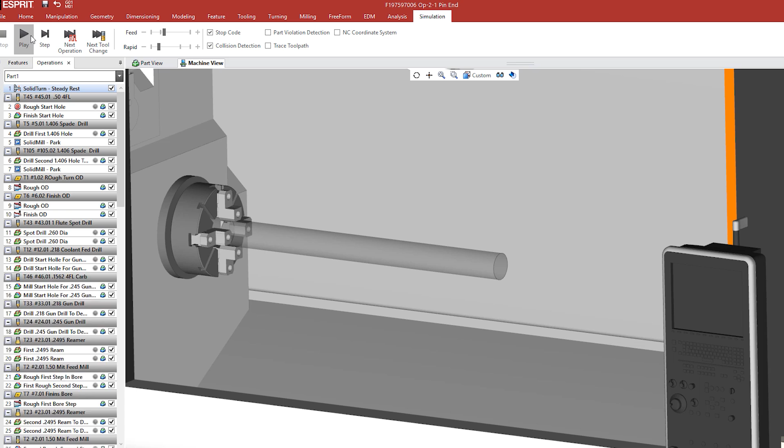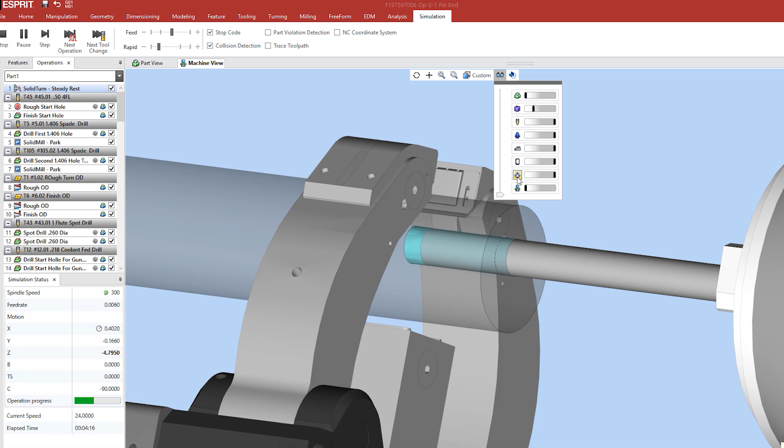I wanted to make a little video here about this setup. There's a lot more going on here than seems to be obvious. Right now in the beginning here, I put this in the program just to prepare the setup material, the aluminum setup material with this deep hole that's in there, because the stock that I'm getting, let me hide the steady rest, let me hide everything but what we need to see here.

The stock that I'm getting already has this 1.4 inch hole. I kind of mentioned this in a previous video on making this piece that's going to go in this hole that I'm going to drill into, which you'll see a little bit later in this simulation. But there's kind of a lot of things going on here, and you have to make the right order of sequences to get this done.

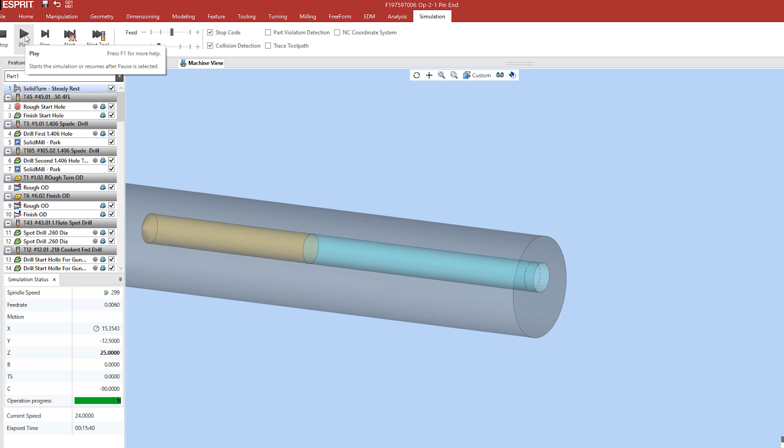So that was just to drill the hole in the setup material. And now this is going to be the actual beginning of the machine work that's going to happen. So here's the rough turning OD. There's a thread, kind of a pin end thread on the end of this part, and this is just roughing down here. It's taking kind of shallow cuts, you might notice, because there's actually holes that this tool is going to be intersecting.

I wish I could get rid of these. See these icons that come up for the speed of the simulation? If anybody that's working for Esprit sees this, let me know how I could get rid of those little pop-up things.

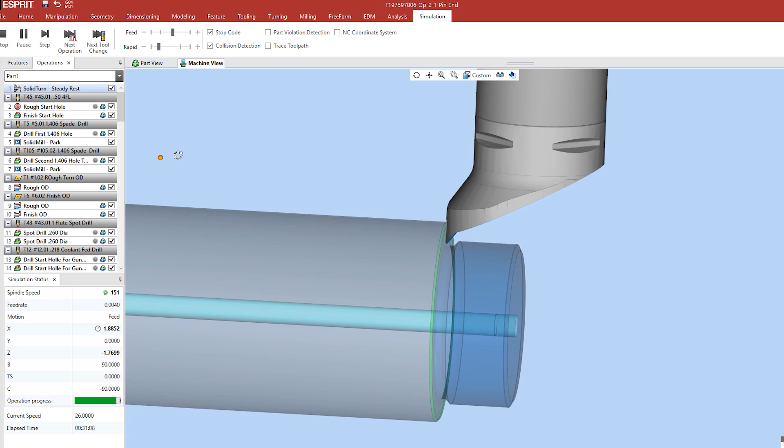But anyway, that's the finish OD tool. It roughs the thread relief, and then it finishes out the OD for that end. Now this is just going to spot drill for some holes that start the gun drills that go in here. That's milling one of them to size. And this is a .218 diameter gun drill that goes deeper down in the part below the ports that are going to be put in the end of here.

And one of the reasons I want to show you this simulation is the importance of the order of operations in a setup like this, because if you do certain things before other things, you wouldn't be able to accomplish the machine work, is the only way I can kind of put it. So in particular, this hole that it's drilling right now, there's these pins that go in the bore here, and they get halfway machined away. So that's the initial reaming of those holes, just so I could start the reamer further down here. You'll see in a second what I mean.

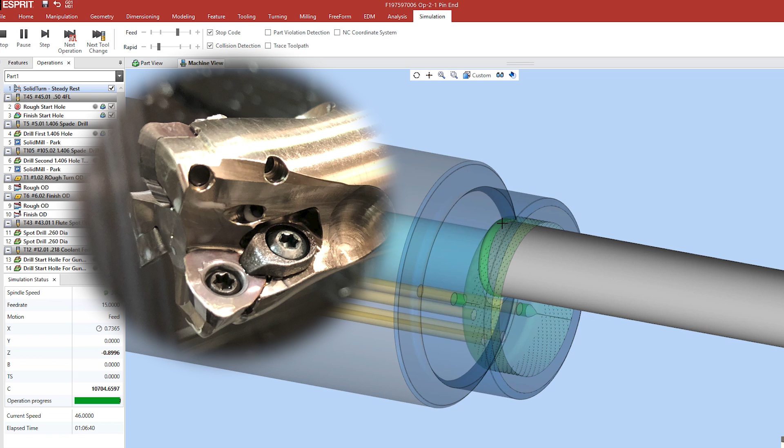So this is a feed mill, 1.5-inch diameter Mitsubishi feed mill, actually, is what I'm going to do this with. So it's going to rough down that. Let me pause the simulation right here a little bit. It roughs the initial counter bore, and this bore has a counter bore, and then it gets a little bit smaller up in here. And if I play this a little bit more, you'll see what I'm talking about.

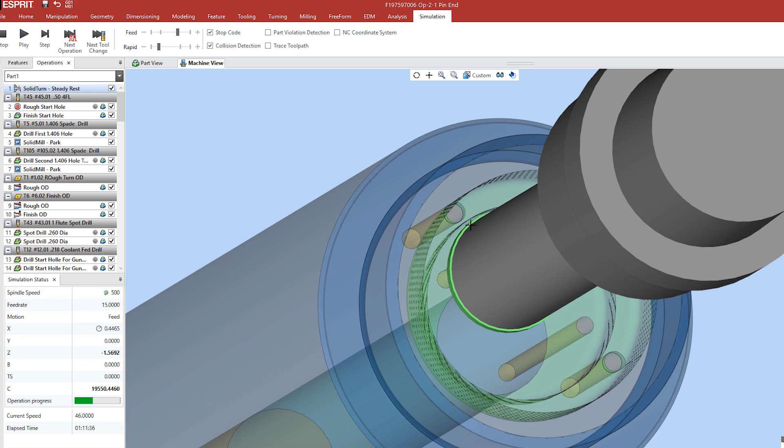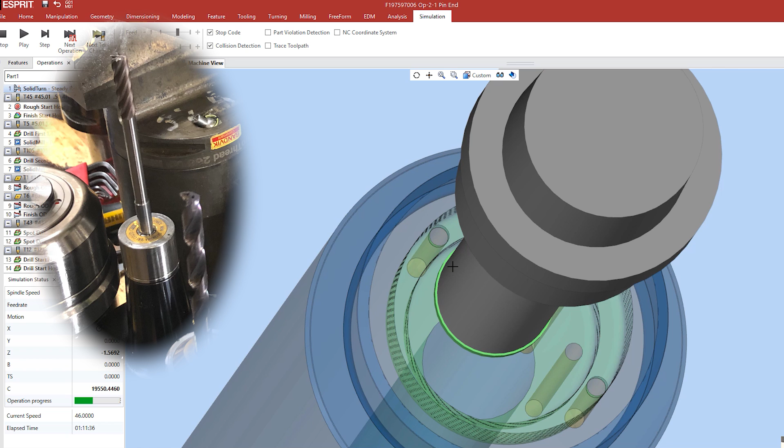See why I had to drill those holes first, because it's going to machine away, but I have to leave stock here, if you see this hole, so that I can finish reaming it. And the only reason I didn't ream it all at one go is my reamer's just not long enough to reach down in there. The shank of the tool had to be relieved even to get from the point here down. But if I went in and machined the bore out to size at this moment with this feed mill, it would be cutting halfway into this hole, and I wouldn't be able to finish it to size.

So what I'm doing is I'm roughing it out up to the hole here, down to almost the finished depth, and then I'm going to come back after that and finish reaming those holes. But like I said, the reamer that I have, or the reaming tool, well, this is just a boring tool to bore it out a little bit more there, and this is the reamer. Pause the simulation here, let me slow it down a little bit, and it's going to ream down to depth, as you see there,

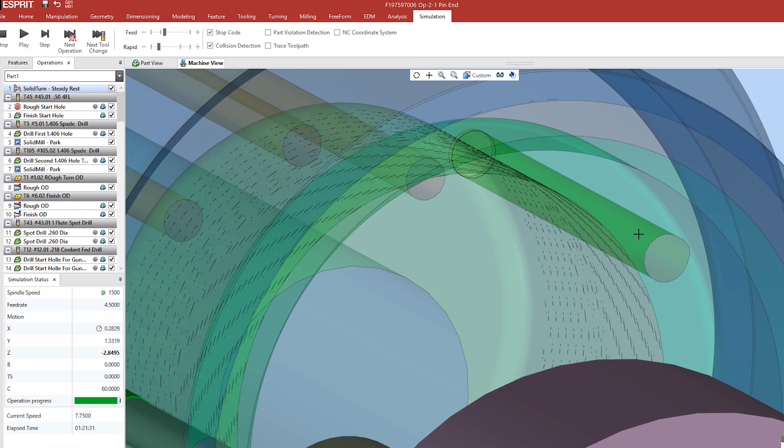the depth necessary. But if I was to have roughed out that material, there would only be half the hole left for the reamer, as you're going to see in a second here, because the roughing end mill is going to rough that out after this.

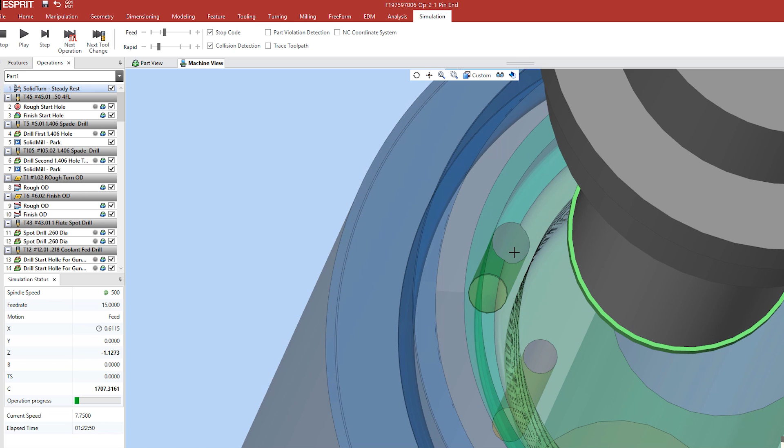So then we come back with the feed mill again, and if I let it run a little bit here and then pause it, let's see if I can pause it here. You see how this is cutting half that hole away, because what they do is they put pins in this bore, and it must index something, and half the pin projects into the bore, and the only way to get that hole in there is to drill it before you rough the bore out.

Well, I have actually milled them from the side, like with a 5-axis move, but that's kind of a pain. I'm just going to try to do it this way on this part. The only disadvantage to doing this is it gives you a little bit of an intermittent cut on the finished boring tool, but I don't think it's going to be too much of a problem, and this titanium's pretty soft. That might give you more of a problem in something like Inconel than this material.

So let me kind of speed this up a little bit more. Yeah, this software has this window that comes up here. If I move the mouse away and back, see that little pop-up window about feed override? I wish there was a way I could turn that off for these video simulations.

So that's the feed mill roughing down now the bore to full size almost. And then this is just going to be a heli mill, ISCAR heli mill, to finish the bottom face. And the only reason I'm doing this is because I don't want to put a small enough boring bar in to face down to the middle.

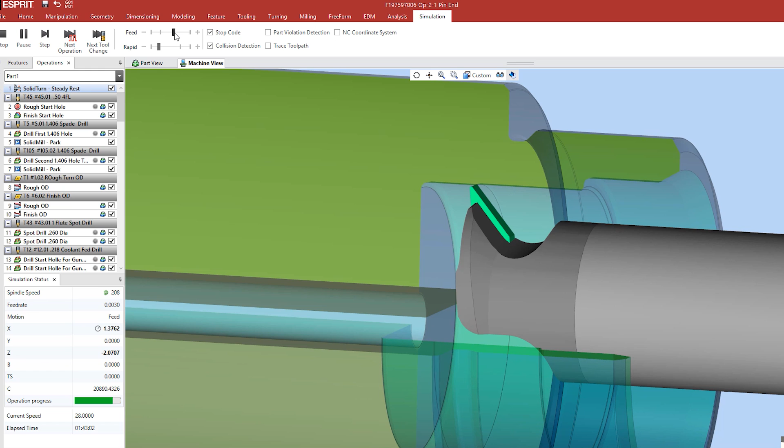So this is the, maybe I could just cut this away, you could kind of see this better. This is the roughing boring of the remaining smaller counterbore below. It already roughed this one above, and then it's going to do a finish cut down the whole bore. So that's the finished boring cut. And then let me see, I can't remember what tool comes next now.

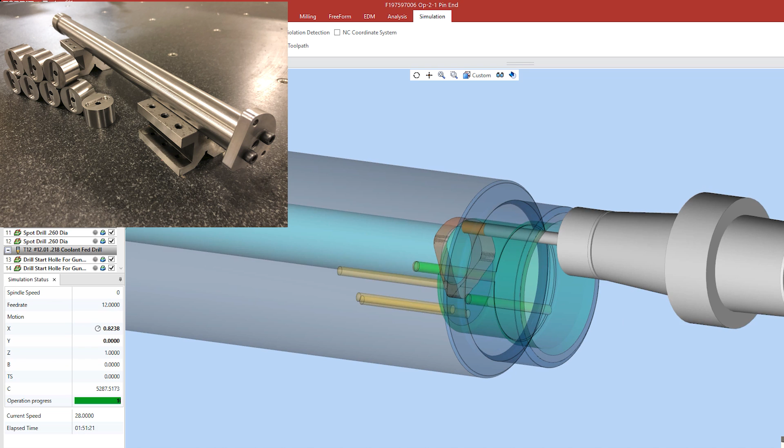Oh, this is a little, I don't know if you remember the last video I made, there was this little drilling fixture thing, and this is the part that's going to mount in the part to hold the other piece down in that hole to drill. You'll see that a little bit later in this simulation. So everything kind of has to be done in the same order.

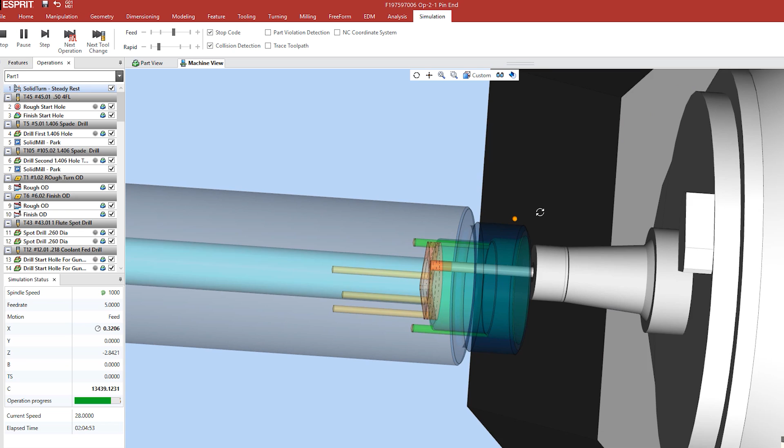You notice on this new Esprit simulation how you can put the actual models of the tool holders. If I turned on, well, let me not turn on that, but I'll turn on the spindle of the machine. You can see the spindle of the machine here, but it's clearer without that.

So for right now, this is a 5/16 end mill. It roughed it out with a 1/2 inch end mill, and then this is the heli mill again to rough this bore. Now this is an issue here that I have to be very careful with, because this bore gets roughed. I'm going to pause it right now for a second and get up a little closer here.

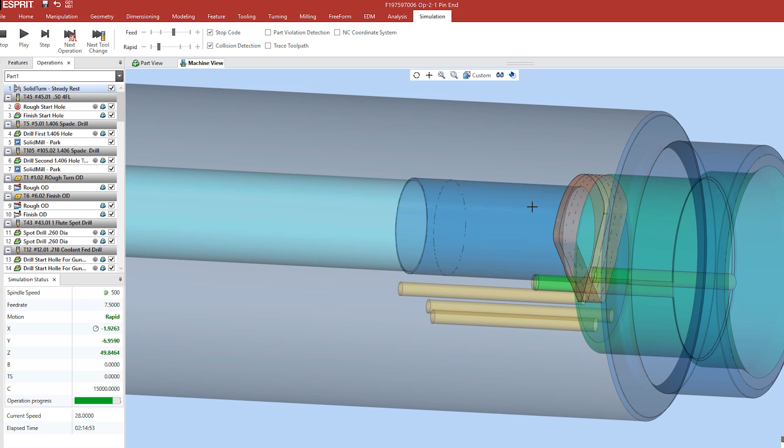Maybe I should look at it from the side a little bit more here. The first part of this hole here has got a close tolerance and finish, but the back part of the hole, for some reason the engineer designed it with a 38mm bore, or drilled hole if you will, but the hole in the front is only 1.501 plus or minus 1/1000th tolerance, and it has to have a 32 finish that goes back in here. You'll see that in a second when it finish bores it.

But if I was just to drill this with drills, 38mm is 1.496, and the finished bore in the front here is 1.501 plus or minus 1. And if I put any kind of little scratch or anything in the front of this bore, it would pretty much screw the part up. So I need to be very careful here.

What I'm doing is I'm going to rough this out down beyond that bore, and then we're going to come in with the boring head and bore it to size to the 1.496 diameter of the drill. So that's what that's doing there. And then I'm going to come in with the short drill. I've got to do this with 2 drills because it's such a deep hole.

And what I'm going to do is feed into that hole with the drill running backwards to where I get beyond where this good finish has to be, so I make sure I don't scratch it or put a gouge in it, because I'm only going to be boring out about 5 or 6 more thousandths of an inch off that, which is only 3 thousandths on the radius on the wall. And so I can't afford to put any scratches that are too deep in there.

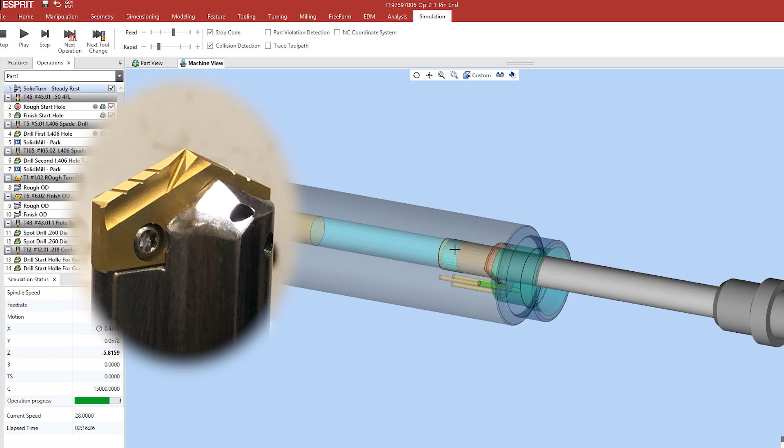So this spade drill, I'm going to run it in reverse at a low RPM till I get back into here like you see it, and then I'm going to drill down to depth, and I'm going to basically do that with all of the tools that go down into this hole. So this is the short drill,

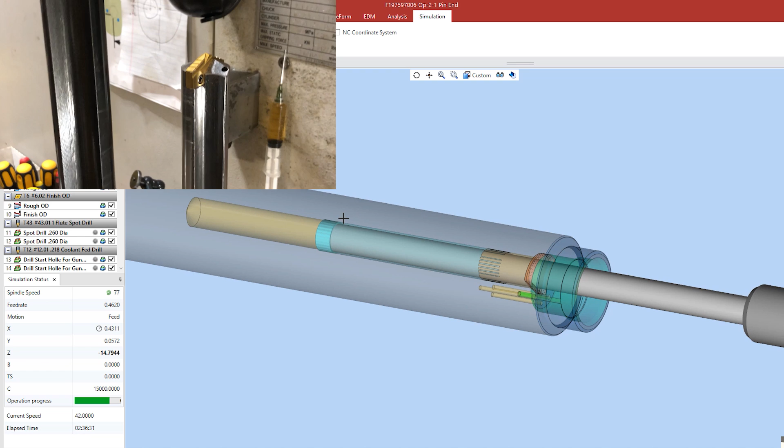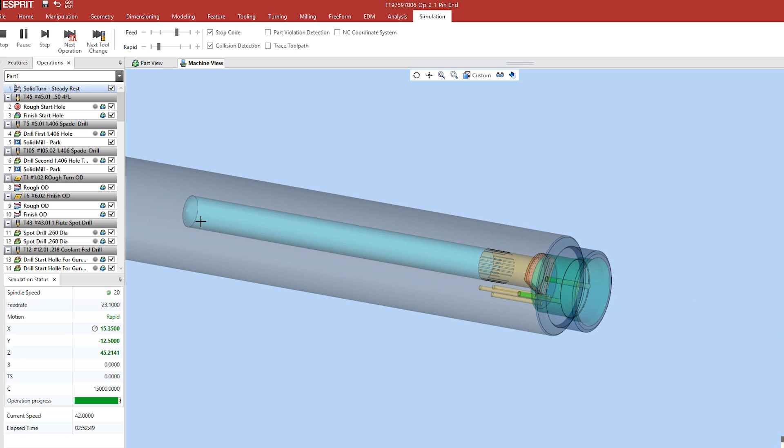and you may have seen these drills on the Instagram post that I showed, and then this is the longer drill that's going to go all the way to the bottom, which is 20 and a 16th of an inch, 20.06 inches from the face of the part to the bottom of this hole. And then the bottom has to be flat bottomed with a 0.190 radius on the corners of the flat bottom. So that's what this drill is doing right there.

So that's the drills. And like I say, I have to be very careful of the front of this bore right here, kind of where the mouse is, not to scratch it or gouge it too much to where it won't clean up to the 1.501 diameter. So that's important. And these are the 2 screws that I talked about in the previous video that's going to hold that drill fixture in.

Now there's the boring head to bore it to size. So that's how deep the 1.5 inch diameter goes into there. These little marks here you see are the simulation. If I increase the resolution in the simulation, you probably wouldn't see that, but it takes longer for the computer to handle it.

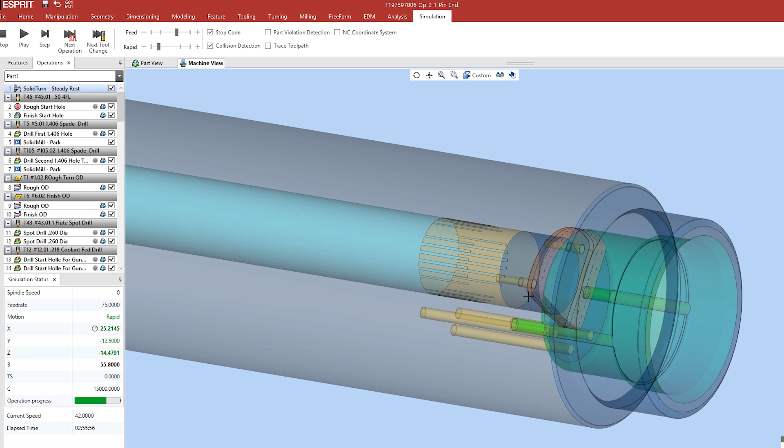So that drill fixture thing that I made in the earlier video is going to fit in this triangular kind of pocket, and it's going to hold the sacrificial piece way up here at the other end of the bore, or hole if you will, so that I can drill these cross holes, which you're going to see later in this simulation. So let's just continue to play it.

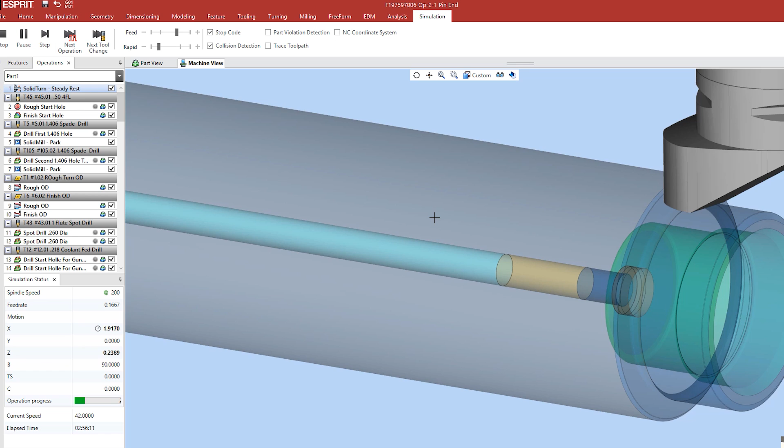This is the OD thread, and then the blunt start. Let me make this more solid so you can see this blunt start a little better. I've had a lot of people ask me about blunt starts in the comments, or a Higbee blunt start, whatever you want to call it. Now you can see it's milling it here. And this is the way I typically do it on the Integrex, because I like the way this finishes the blunt start.

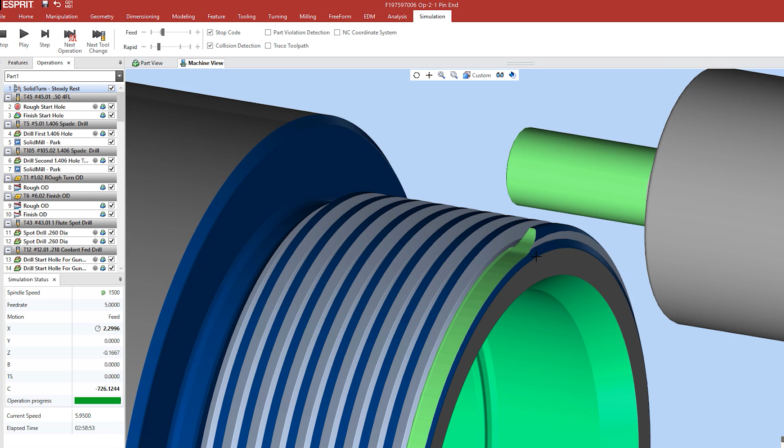This thread in the simulation will probably be a little bit deeper in reality. That's why you see this little bit of a step in the blunt start, because I don't think I've gone to depth in the simulation on that thread. I think it'll go a little bit deeper. I went to kind of the minimum depth on the Acme thread according to the gauge maker information, and I usually adjust that with the offset on the machine when I thread it.

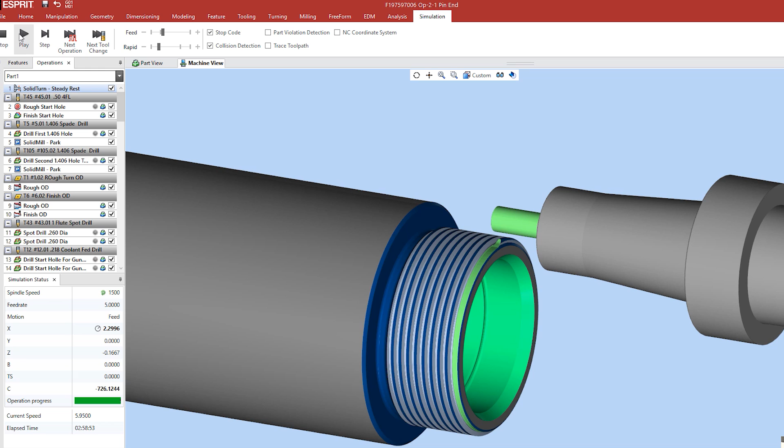But there's a couple different ways to make a Higbee or a blunt start, and the way I do it on the mill is I just draw a helix, and I profile down that helix that matches the pitch of the thread, of course, and the way you can line this up is using a different fixture offset, and you use your C-axis fixture offset to line it up. So I usually start the blunt start helix right at Z0, and I feed in with cutter comp, and then I go around the helix.

In this case, it's rotating the C-axis to make it, because I can't go below X0 too far on this machine. If you had a machine that could go further around, you could just mill it down around there. But this Integrex only lets me go 10 millimeters X minus, and then it hits the limit of travel. So I have to do everything above and do a rotary milling type of thing. But basically it's the same thing, just a different style of milling.

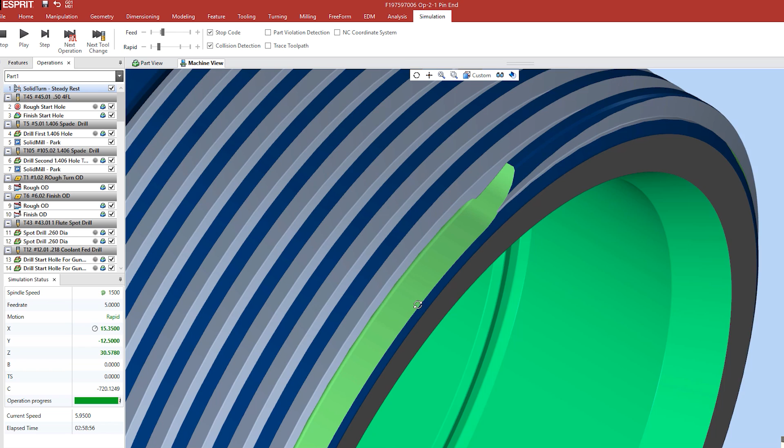And what I usually do is, you see where the thread just kind of angles out to nothing on the end of the part, and it's pretty easy to line this up.

If what you do is you program that helix, you don't worry too much about the alignment of it in the simulation, although it actually looks pretty good here, but it wouldn't matter because you can adjust it when you run it on the machine. So what you do is you let it come in single block until it's right at the beginning of that helix, and then you stop the machine and you look at it and say, am I in line with the beginning of that thread or not? Right where the last scratch of the thread comes out the face of the part.

And if you're not, you kind of estimate the amount of angular displacement or rotation that you're off, and then you adjust your C-axis fixture offset that you're running this on. You run it on a separate fixture offset, and you adjust the C0 of the offset until you get it to line up when the tool first comes in here, and then it'll go around and it'll be in line.

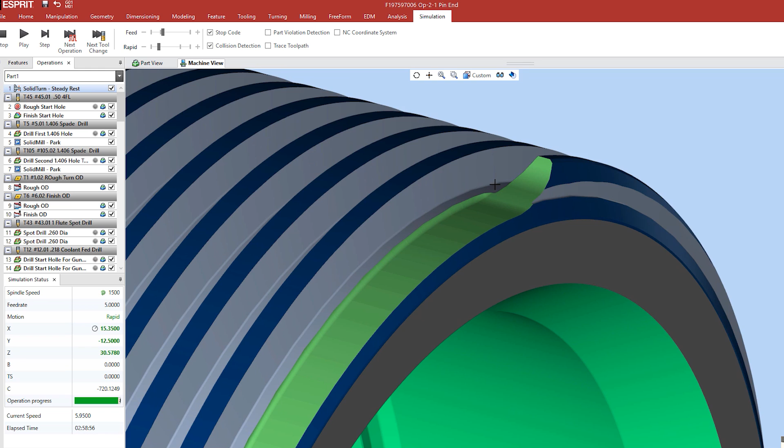Now, an Acme thread has a flat on the bottom of the thread, and it's pretty easy to line up an Acme thread. But if it's a V thread, once you get your rotation in the right place, you can stand off with your Z offset on your tool, keep moving it in and keep rerunning the Higbee until you get it lined up with the bottom of the V of a V thread, and then use your diameter offset because you're using cutter comp here. If you programmed it that way, you can adjust it till it gets down to the depth of the thread. If it's off a little bit, you can start with the cutter bigger and then move smaller until you get it lined up, which is what I'll do in this case as well.

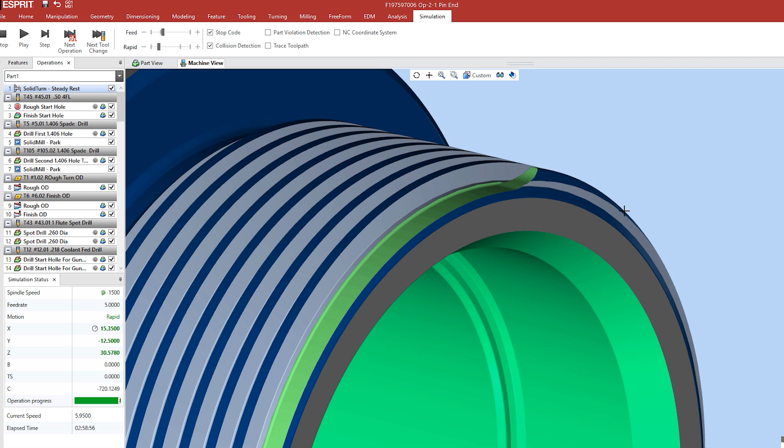So that's the way that I like to do a blunt start, and I like it also because I like the shape of it here rather than using a grooving tool. Now the other way is with a grooving tool on a lathe that has no milling, and you program a very short threading cycle just like the one that makes the longer thread, and you pull the tool out after you get maybe one lead of the thread in. You retract the tool, or you make it only that long, and depending on the RPM you're running and how fast the rapid movement of your machine is, it depends on how far it carries this around, but it tends to make it more like that gray color you see there when you do it with a grooving tool, and I don't like the shape of that as well.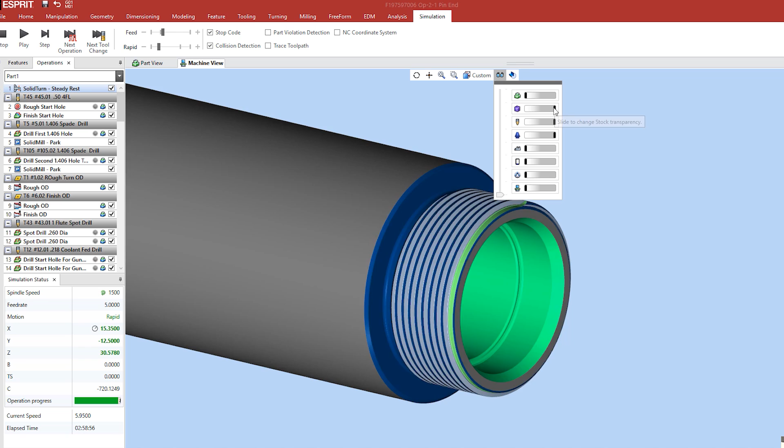So that's a couple different ways to make a blunt start, and you do it the same on the ID as the OD. There's no difference really, except that you kind of have to conventional mill it on an ID thread, but that's really not a problem with this. It's such a little amount of material you're taking away. So that's the blunt start. Let me go back to a semi-transparent view, and we can see the rest of this.

So the next thing is a chamfer on the front of that close tolerance bore, and that also has to have a 32 finish on it. So I'm just doing that with a separate tool. Let's see, I can't remember what's next. Oh, these are the port tools. So this is just a drill to rough the ports out, not to size, but just to get the major meat of material out of there. And then there's a rough porting tool, which is this tool, going to feed in to rough the port and get that little counter bore in the bottom roughed out.

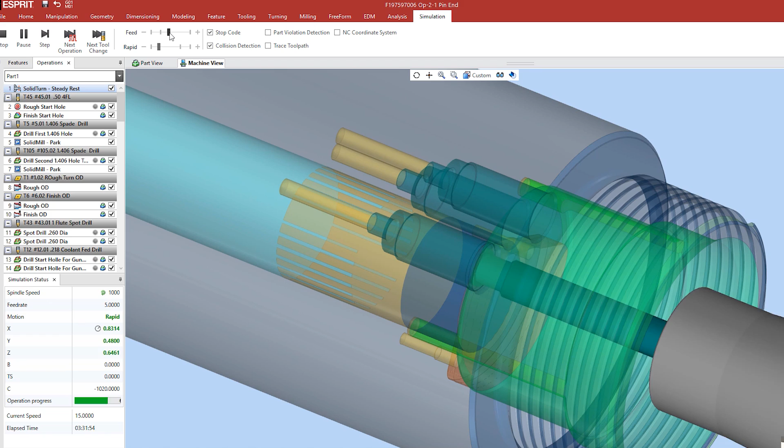And I posted an Instagram post showing some tools that I was setting up for this, and I showed these in the picture, the real tools. And then here's the finished port tool. And I found that I have to feed this up and back. I don't like to do that with tools too much, but in this case, if you just rapid out of that hole, it leaves kind of a spiral mark in the hole, and they don't like that because this finish has to be good on this port. Some kind of O-ring seals or something in there. And so then there's a snap ring groove here, which I ground a special tool for. And then there's these spanner wrench holes in the OD of the part on this end.

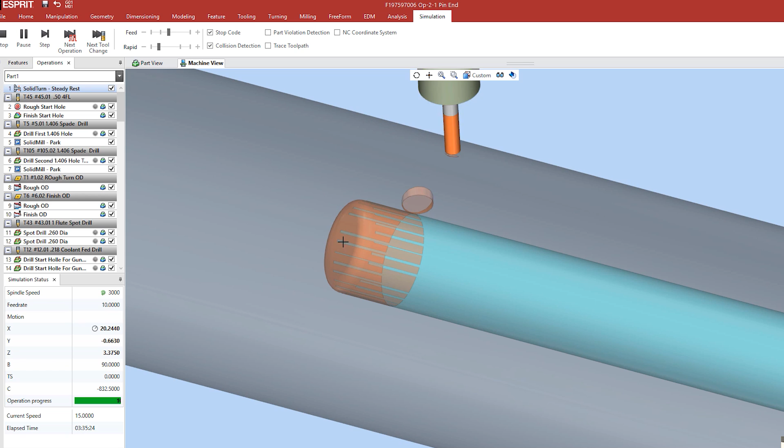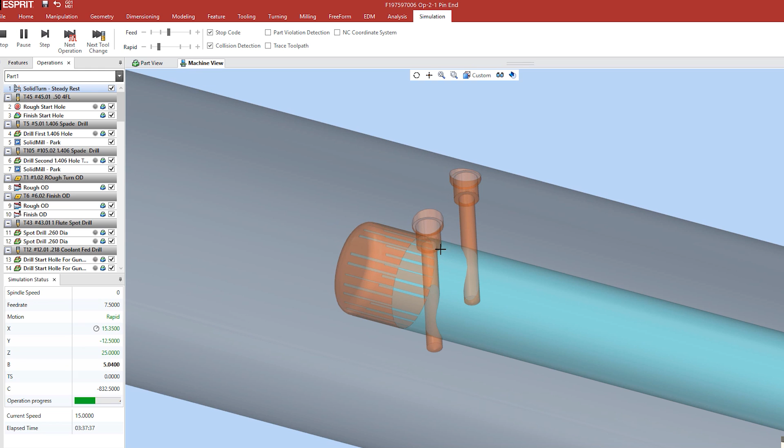And so then we come up to these holes up here, which is what I made that drilling fixture for earlier. I don't have the fixture modeled in this model, but you can kind of get an idea what it's going to do. It's a spot drill, so that this drill doesn't wander off too much. And I drilled part way down so that I can start milling these counter bores, because my drill's just not long enough. I couldn't find the right length drill, and now I drilled a depth with that drill, and I was just a little beyond the flute length.

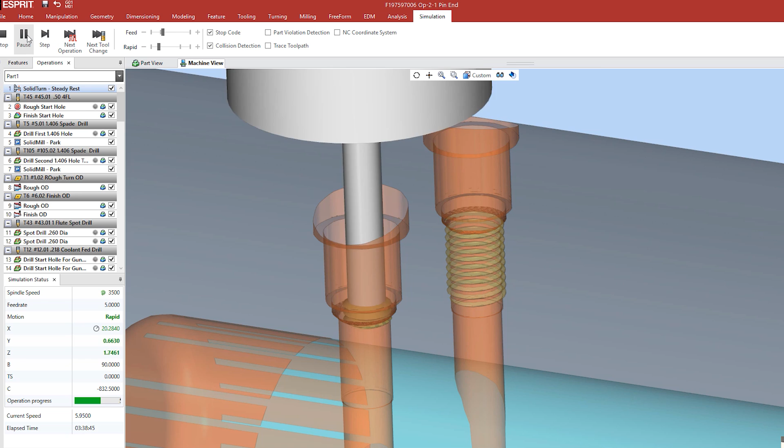So then I resized. There's a thread that's going to go in here, and I have to size that hole, and let me pause this a little bit and mill this chamfer in the beginning of the thread they specify. And here's a 5/16-24 thread mill. Let me slow this down a little bit so you can see this. Oop, a little bit more maybe. So this is a thread milling cycle, and that's one of those thread mills with just 3 teeth on it out on the end.

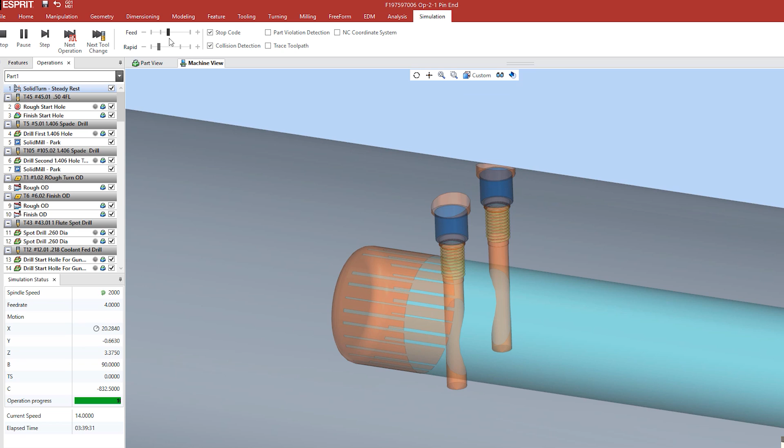And we come back on and bore these holes to size with the boring head. I'll probably really use a bore orient retract cycle, but on this simulation it'll show a collision with the boring bar if you actually put it in the program here for some reason. And then a chamfer on the top of those 2 bores. There must be a plug with some seals that's going in there to seal off. I think they put some kind of pin.

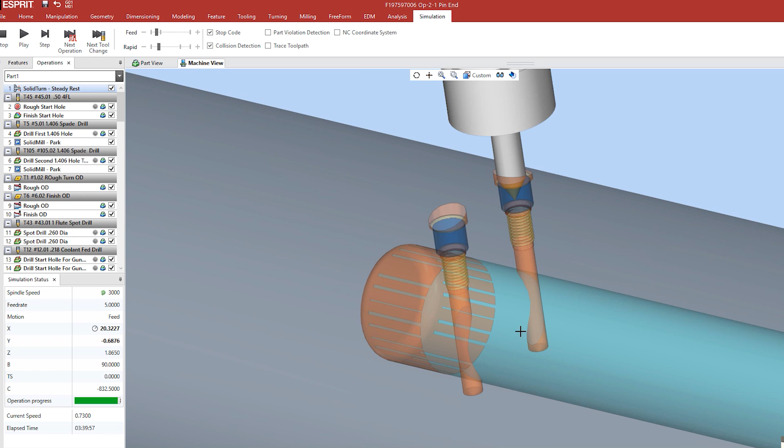You can kind of see the reason that I needed that plug to support the drill now. So you see how the drill is almost totally in the hole itself, and you would never be able to drill a hole like this. It would just deflect and either break the drill or mess up the bottom of this hole down here, by deflecting the drill.

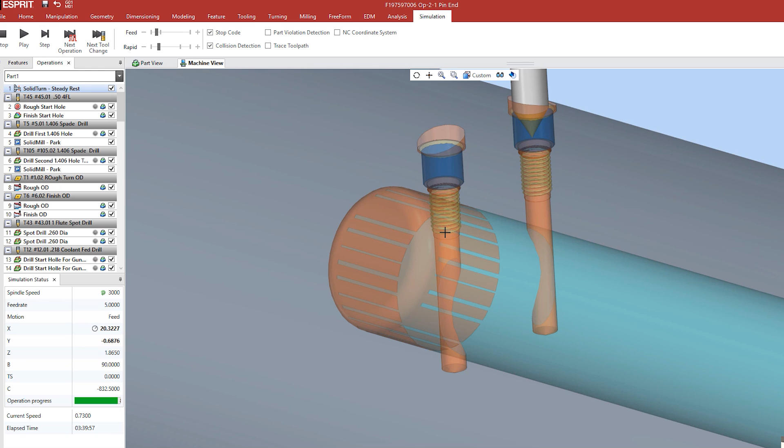And it might be possible, some people in the comments on that video on this device suggested doing some kind of an end mill down in there, but this is a 1/4 inch diameter hole, and that's an awfully long end mill to reach down beyond this threaded part and mill all the way down to here, and it would be just very difficult to do, if even possible at all.

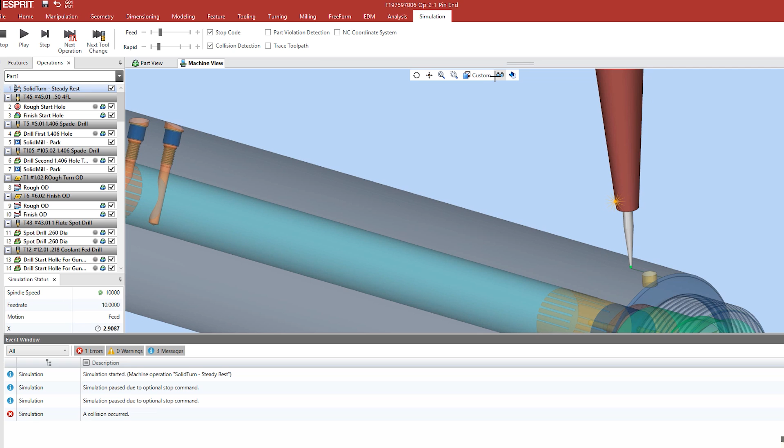So that's everything there. Now here I'll get a collision with the steady rest. It actually shows it in this software, but this isn't the way my steady rest is. Right there it collides with the steady rest. So let me turn on the steady rest so you can see what's happening here. See, the tool is hitting this. My steady rest doesn't have these things on it. The jaws only come out as far as this radius, so this won't happen, but this is the model that Esprit gave me for a steady rest, which is almost like mine. I need to remodel mine so that it's a little bit more accurate.

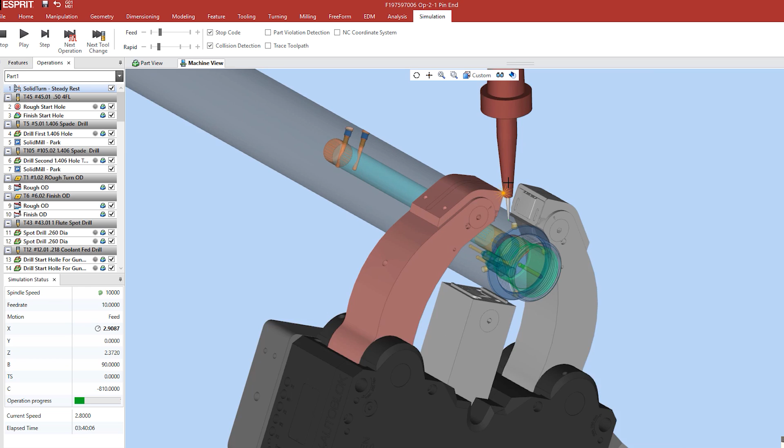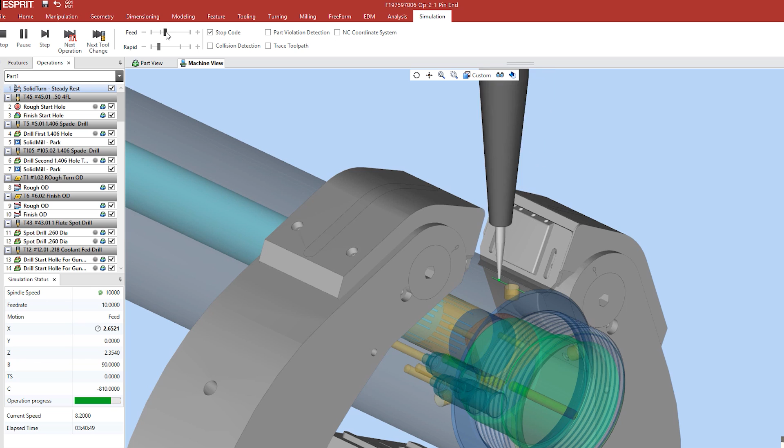You see it's kind of hitting these seals on the OD of the part and not closing all the way in this simulation. This steady rest actually opens and closes in the simulation in the beginning. So if I turn off the collision here, and then I can play this. And this is just a timing mark that they've put on the part that has to be milled in there, which I'm using one of my little ball end mills I had set up for the previous operation on the other end, the 1/16 inch ball mill.

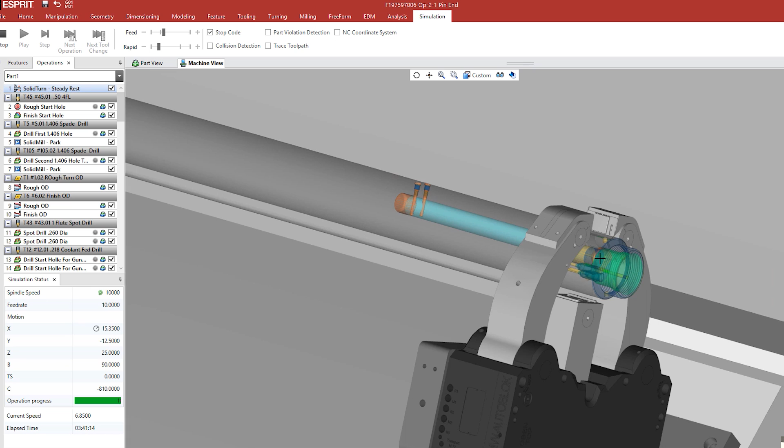So that's the completed turn on everything here. You can see the whole machine and everything. That's a completed operation on this end of the part. And like I said, I just wanted to show the importance of the order of operations here, and why it's necessary to do things in a certain way. And I thought it might be interesting to see that. And it's kind of hard for me to show this in a video of the actual machine work because it's all happening inside and there's really nothing to show. You're just seeing this part spin in the steady rest.